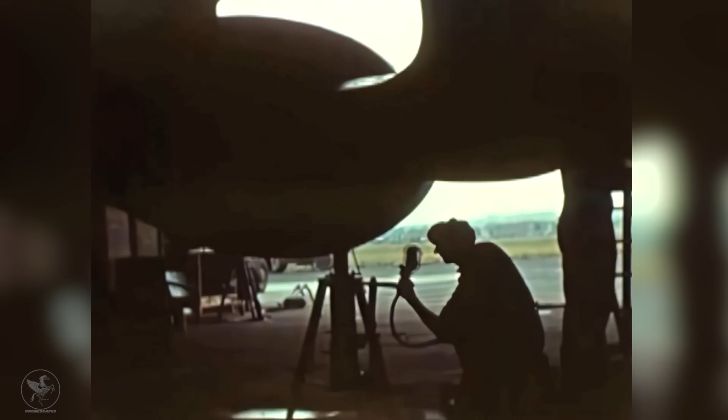On June the 12th, 1944, a new and deadly aerial threat appeared in the skies over southern England. Fast, sleek, and powered by a pulse jet, it was the world's first cruise missile, the V-1 flying bomb. In response, the RAF rushed into service its most advanced and secret weapon, the Gloster Meteor Mark I.

This happened in 1941. I was ferrying a Wildcat from Scotland down to Croydon.

I ran into extremely bad weather over Lincoln, and it was any port in a storm. I went into Cranwell. Although they were reluctant to have me, they realized the weather was bad and they let me land there. And I was astonished to find the place

alive with civilians. And I thought, this is an RAF airfield. Where are all the RAF people? And there were civilians everywhere. When I got out and asked what it was all about, there was a great conspiratorial air about everybody.

Nobody would tell me why these people were all there. And I was roomed up with a guy who was a very nice fellow. I became very firm friends with him. And I kept asking him what all this was about. And he wouldn't say, and as a diversion, he took me off to the cinema that evening to keep me

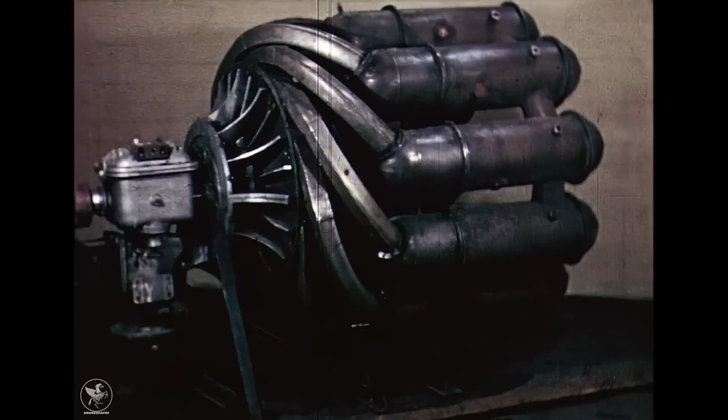In April 1937, Air Commodore Sir Frank Whittle's first gas turbine aero engine was given its initial trials. This engine was designed and built with the assistance of the BTH Company. The firm of Power Jets Limited had been formed to proceed with its development. After working under Whittle's direction at a small factory near Rugby, the firm moved in 1943 to a new factory near Leicester, built for them by the government. Here, rapid progress was made in the development and manufacture of Whittle engines.

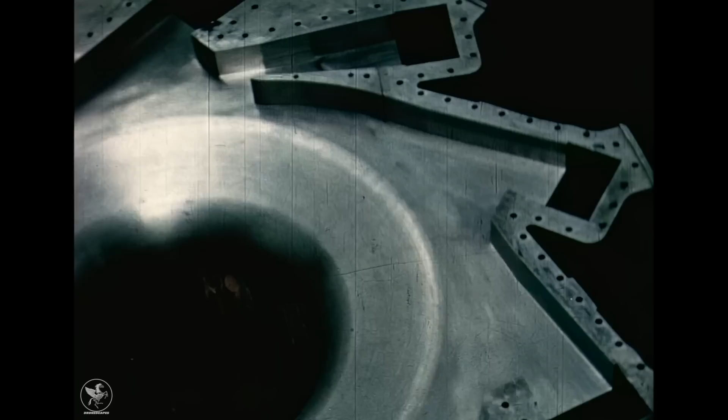This is a model of the W2/700 engine, which, although weighing only slightly more than the original flight engine, developed 3 times the power. The way in which the Whittle jet engine works is simple. Air is drawn into the engine by a centrifugal compressor. Although similar to the compressor of an ordinary aero engine supercharger, it is much larger, handling more than 10 times the amount of air.

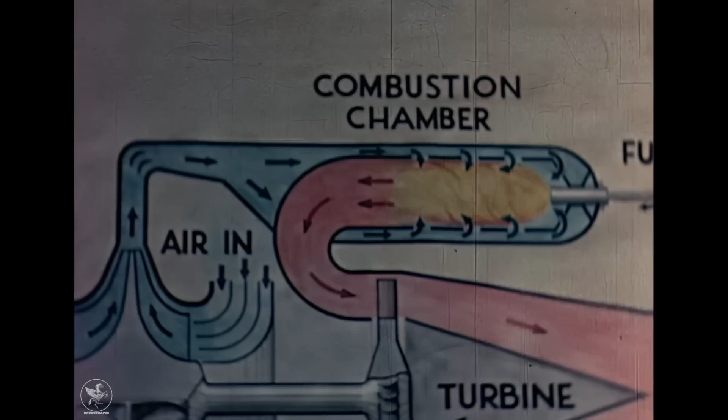After being compressed, the air passes to the combustion chambers, where it is heated by a spray of burning paraffin or petrol. The heated air and products of combustion then pass straight to the turbine, which is driven round at speeds up to nearly 20,000 revolutions per minute. The turbine in turn drives the compressor, to which it is directly coupled. A large part of the energy in the heated air is absorbed by the turbine, to enable it to drive the compressor and fuel pump. The remaining energy is used directly in the jet to drive the plane forward.

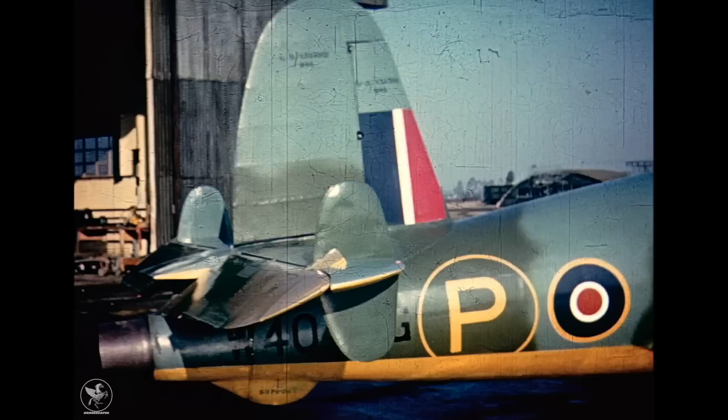In May 1941, the first flight of a British jet-propelled aeroplane took place. Built by the Gloster Aircraft Company and powered by a Whittle engine, the E.28 was purely an experimental plane. With this plane, much useful flying experience was obtained. The absence of noise and vibration in the cockpit, coupled with the simplicity of the controls, greatly impressed the pilots.

The E.28 can now be seen in the Science Museum, South Kensington. Here is the prototype of the RAF's first jet fighter, the Gloster Meteor. The early Meteors were powered by Rolls-Royce Welland engines. These were a development of the Whittle W2B engine.

The first RAF squadron to be equipped with Meteors was number 616. After carrying out their initial training at Farnborough, they transferred to Manston Aerodrome, Kent, in the summer of 1944. While at Manston, they went into action against the flying bombs, and were found to be the most successful of our fighters, shooting down the greatest number of bombs per flying hour.

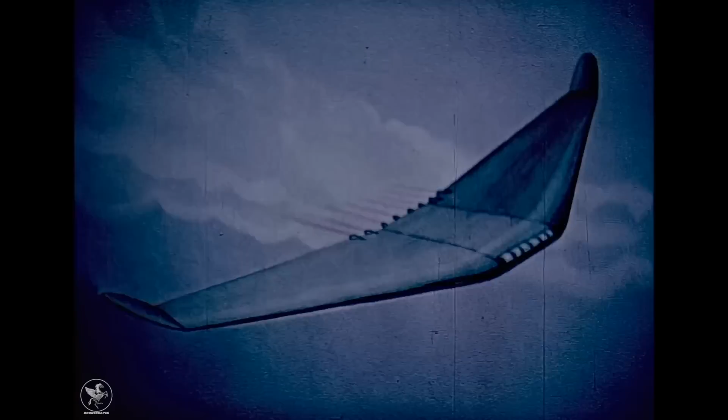We were running into all sorts of difficulties in 37 and 38, not the least of which was the financial problem, because our financial backers were expecting miracles, I suppose. They thought we would have an aero engine within a matter of weeks. Well, of course, we had breakdown after breakdown, and they began to lose heart. And they did not produce the money that they promised. They had an option, you see, to produce a certain amount of money after a certain amount of time, and they obviously got cold feet.

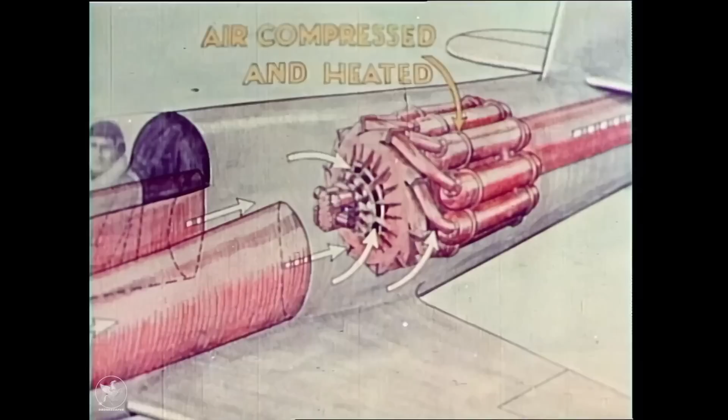The result of that was that the control of the company passed into the hands of Williams, Tinling and myself. It didn't give us any money, but one of the conditions that we made for Falk Partners to stay in the job was that they found a certain amount of money, and they did, in fact, put in another £3,000. And we were further helped by the fact that the BTH accepted 2,400 shares instead of £2,400 for a reconstruction of the engine.

When we were in financial difficulty, the Air Ministry were very hesitant to help because we were in financial difficulty. There was a catch-22 situation going on. They said, this is a company backed by the city, Falk Partners being a city company, who are just out to make money quick. And here they are running out of money. They don't have the courage to put money in. We're not going to risk our money. And so, as I say, you had a catch-22 situation.

But they did, after we'd first run the engine and shown that it at least was self-driving, agree to a very limited contract, £200 an hour for running of the second edition for 10 hours. That would have been £2,000, £1,000 for a report on what had happened up to then, and so forth. A contract which totalled about £5,000.

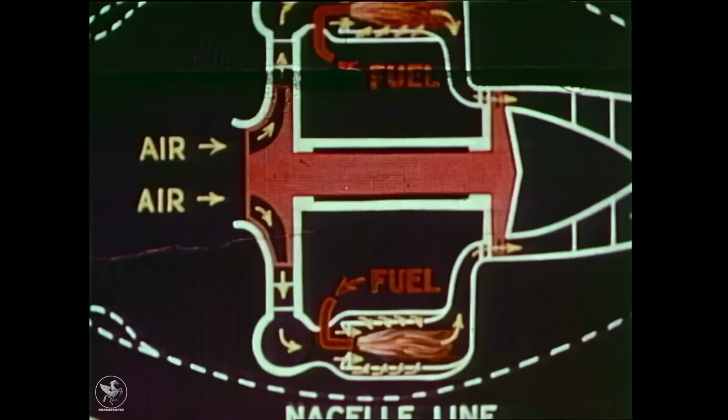But there was another catch-22 situation came out of that, because as soon as they gave us a contract, we came under the Official Secrets Act and couldn't raise private money. Because you can't go to people and say, look, we've got a wonderful idea, put some money into it, we can't tell you what it is. So the acceptance of a contract from the ministry virtually stopped us from raising private money.

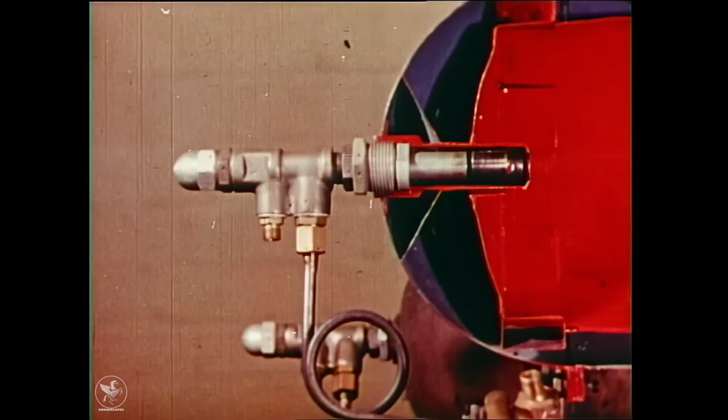However, you had in, I think, Sir Henry Tizard, and I think also in Arthur Tedder, some fairly staunch friends during 37, 38, 39. One of the big factors in the course of the development was that we enlisted the interest of Air Marshal Tedder and Sir Henry Tizard. Sir Henry at that time was chairman of the Aeronautical Research Council, and he, you might say, was a believer in gas turbines, and fortunately too he seemed to be a believer in me. He seemed to think that I knew what I was doing,

and I think in the light of events he was possibly right. And Tedder came up to see what we were doing and saw the engine run and was suitably impressed. And he became a convert and decided to back the project. But at that time, the Director of Scientific Research and the DDSR from the Air Ministry, what was their attitude?

The Director of Scientific Research had been converted a little earlier than Tedder and Tizard, because he was more intimately connected with it. But he'd been a sceptic, you know, up to about June 1939. He'd been giving us the money, what little he did give us, on the basis that it was long-term research. And he thought it would contribute to what was going on at Farnborough.

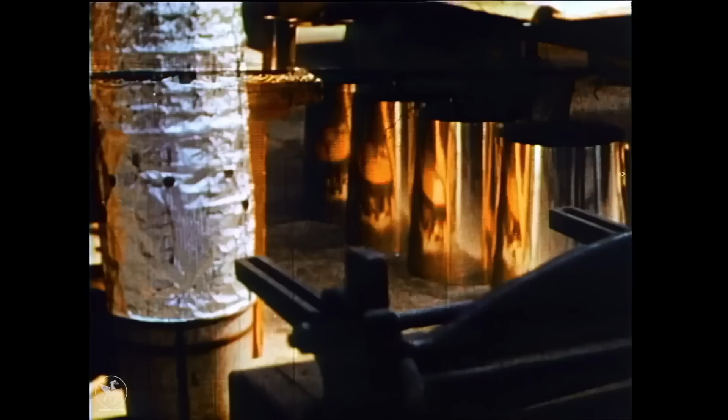And, of course, at that point, was it 1937, 38?

Can you just give me this back?

At that time, you had from Farnborough, in the person of A.A. Griffith, a rather unsatisfactory report. When, just after the engine first ran and we'd submitted a report to the Air Ministry, this was the subject of another report by Griffith, the man who turned the job down in the early days, and his report damned it with faint praise. He brought in all the difficulties, said that no propeller meant that we wouldn't have the slipstream to help us take off, and so forth.

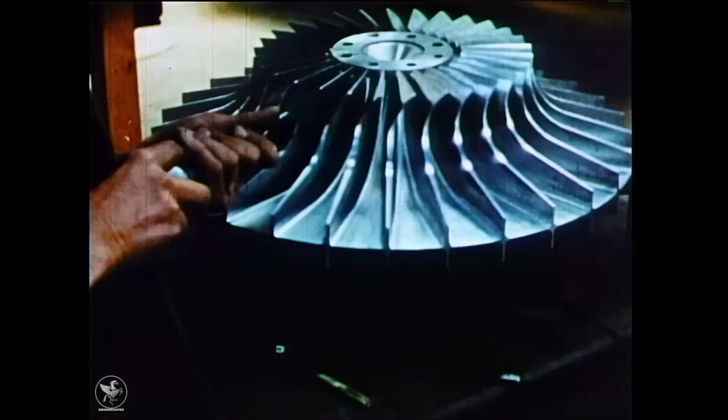And his final conclusion was more or less that it might have some use if high performance were needed for a very short time. I don't know why Griffith reached that conclusion, except that he seemed to ignore what we were trying to do. He talked as though the whole idea was to fly just where the Spitfire and other aeroplanes were flying, namely at heights up to, say, 20,000 feet and so forth. He didn't seem to register that we were aiming to fly at 40,000, 50,000 feet, well, even 60,000 feet.

Fine, I come now to Dr. David Pye, and June the 30th, I think, 1939, wasn't it? Can you tell me what happened on that day, the 30th of June?

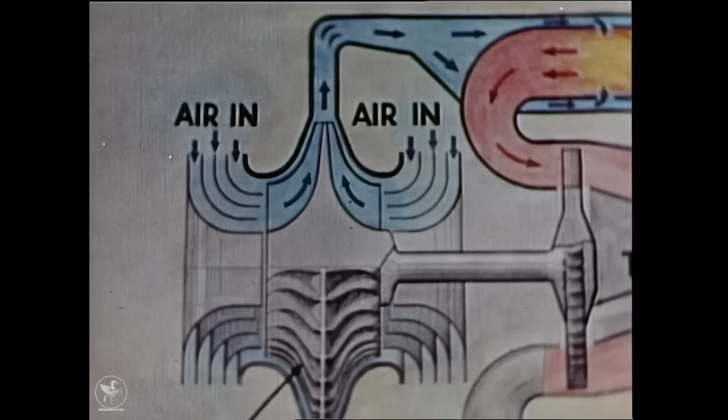On June the 30th of 1939, we managed to get a big breakthrough in the attitude of the Air Ministry, in that Pye, Director of Scientific Research, came up to see the engine run, and we managed to keep it going for about 20 minutes in his presence at 16,500 RPM, at which speed it pulled about 860 pounds of thrust, and he became a complete convert. So much so that he agreed that an engine for flight should be ordered, and that an aeroplane to use it should be ordered too.

Perhaps you could give me that little anecdote about driving him back to the station. An odd thing was that he became such a convert that when I drove him back to the station to get his train back to London, I had the curious experience of hearing him explain to me all the advantages of the engine, that it could run on any fuel, that it was vibrationless, etc., etc.

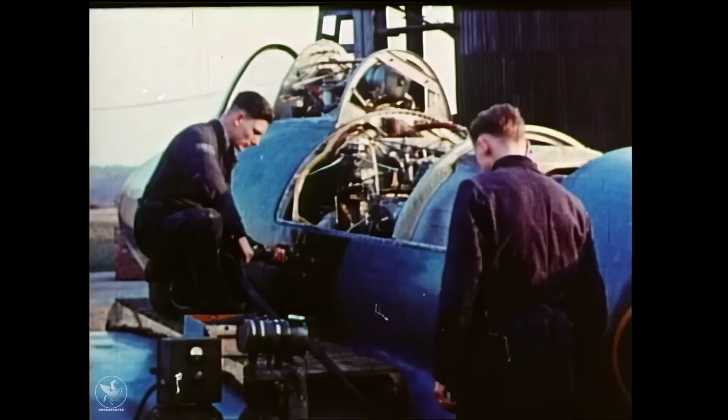When the ministry decided we had a good project, they wanted to give an order for an aeroplane and for the engine. Well, they gave us the job of getting on with the engine, and we subcontracted the building of it to the BTH. We wanted them to give us the order for the aeroplane too, so that we could subcontract and thereby control it. But they wouldn't have that. They gave the contract direct to Gloster's. Well, that was fine, as it proved, because Gloster's, under Carter, proved to be very efficient. So the arrangement was satisfactory in the end.

And we designed the W1 engine for flight, very similar to the original engine called the WU, but very much lighter. It was designed to produce 1,240 pounds thrust, and the weight came out at about 620 pounds. The consequence of having to allow both for the difference in speed between the root and the tip of the blade, and for the difference in speed of the whirling air entering the blades, meant doubling the twist of the blades. Another consequence of this way of designing was that it made a tremendous difference to the end load on the bearing. In fact, the end load of 1,800 pounds they'd been talking about virtually vanished.

Simplicity, I think, was the keynote of the first engine, wasn't it? The simple centrifugal compressor. Perhaps you could explain that. We aimed to have the simplest possible engine to start with. There were certain alternatives open to us, the centrifugal compressor or the axial flow compressor.

The centrifugal compressor is a very simple thing. It's simply a kind of glorified rotor, the kind that you have, say, in a vacuum cleaner, with the diffuser blades on the outside. So there's just that single set of blades for the compressor, instead of the axial flow, which has many, many rows of blades, each of them having, say, 50 blades. So it's a much more complicated device.

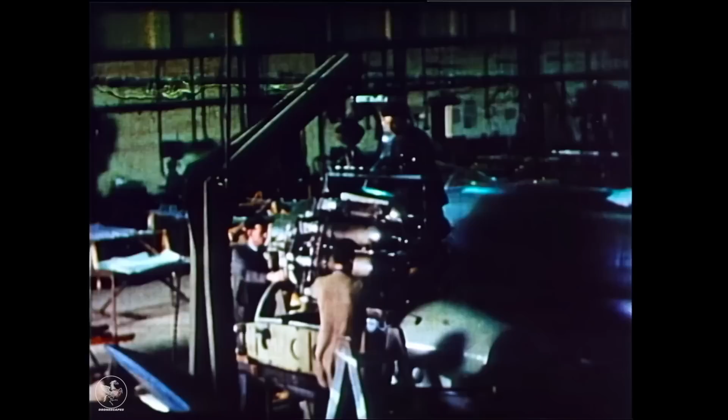You didn't go along with A.A. Griffith altogether in the aerodynamic blade design. How were your blades designed? Griffith had a theory that you should design the blades as aerofoils, but I did not agree with that then, and I do not agree with it now. He argued that you should design the blades; I say that you should design the channels between the blades. The difference being that, since you are steering fluid through channels, clearly it's the channels that are important. If you make an aerofoil and then bend it to give the right kind of angles you need in a turbine, then you get constriction and divergence which you don't want in a channel.

Fine, this may be the point. In fact, I'd like to go over it again in this context. Can you tell me something now about the vortex blading theory and how it came to be an issue?

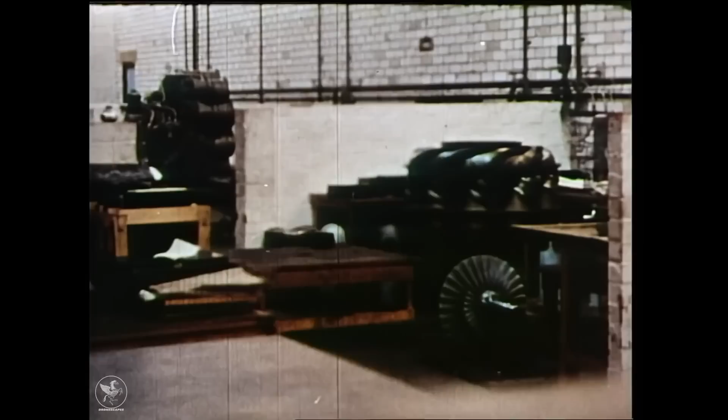I found out more or less by chance that the turbine blades being designed by BTH were based on a quite different concept of blade design than what I thought was proper. I didn't realise this until I went to a meeting in the Deputy Chief Engineer's office, where they were discussing a change in the blade design. They said one consequence would be a change in the end thrust on the rotor—the load on the thrust bearing would be 1,800 pounds instead of 150 or whatever it was. I couldn't understand this, so I went away and thought about it. Then I went up to the blade design office and asked one of the engineers there, L.J. Cheshire, what pressure difference he assumed between the root of the blades and the tip of the blades after the fluid left the nozzles. He said, 'What pressure difference?' To my astonishment, I found they did not assume the air coming out of the nozzles was whirling, but that each pair of nozzles was sending out straight jets, which of course is not what happens.

And the effect of this was that you altered the blade pitch? I pointed out that the fluid coming out of the nozzle ring would be a vortex, and the centrifugal pressure gradient meant there would be a corresponding difference in velocity. At the root, the smaller diameter of the vortex, fluid is moving much faster than at the tips—you see that in water running out of a bathtub, and as the water moves nearer the centre of the vortex, it spins faster and faster. That's what happens in the flow out of a set of turbine nozzle rings. To allow for that, you have to put a good deal of extra twist on the blades—in fact, double the twist that BTH were putting on. And that settled the problem.

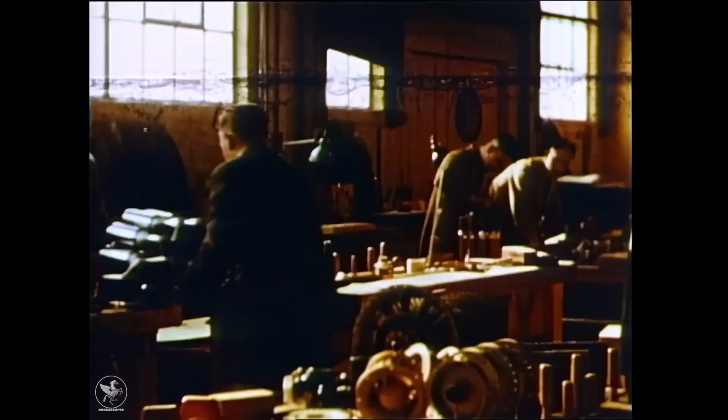Right, I come now to Power Jets itself, the company in 1939. How many employees did you have, and how many were fully trained engineers? In 1939, we only had a handful, about half a dozen. Then at the beginning of 1940 we began to build up a team, and I was very careful in picking real quality—first-class honours Cambridge, first-class honours Oxford, Imperial College of Science, and so forth, Whitworth Scholars. I had quite a collection, and I think I can claim to have built up a brilliant team. A young team, yes, mainly.

There were just... one was a little bit older than myself, and then we added one of my former instructors. He became my deputy. He was quite a bit older than me. That was Wing Commander Lees.

And presumably for the young engineers, how were they recruited in terms of secrecy? When we were recruiting young engineers, they came to this scruffy old foundry we were inhabiting, and were somewhat surprised, I think, when our managing director, as he had become, L.L. Whyte, took them into this old ancient brick building, up rickety wooden stairs, into an office with a beautiful carpet.

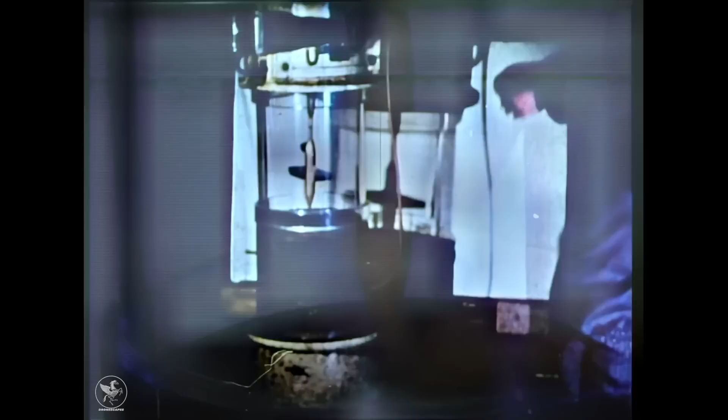Farnborough had started, and indeed was the first research establishment in the world to work on compressibility and transonic testing, starting with the Spitfire 5 back in 1941. Its boffins realised they had the key to supersonic flight, so they issued a specification in 1943 for a supersonic research aircraft. They chose Miles to design the aircraft, with Farnborough's help. This was designated the Miles M52. One has to say they made a very good job of it.

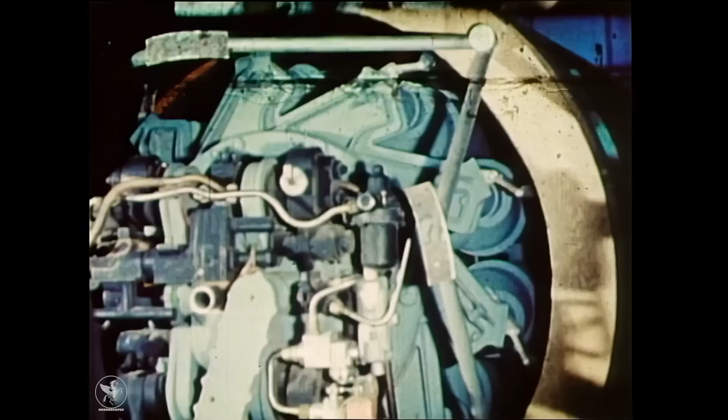It had a special engine to be built by Frank Whittle, a turbine fan with reheat. We believed we could reach 1,000 miles an hour. The aircraft also had a biconvex wing, known as the Gillette wing, and thirdly, it had a flying tail. This folds the tailplane and its elevator into one solid piece, making the aircraft more controllable as it nears supersonic speed.

I think because of the impression I made, or so I'm told, with getting the Mosquito onto the deck, they thought, we'll use this guy in the high-speed flight. In 1944, Brown became the Navy's first pilot to fly a jet aeroplane. By contrast, no test pilot at Miles had yet flown one. I was chosen to be the pilot for the simple reason that the fuselage at the pilot position was only 4 feet in diameter, and you couldn't get a pilot in there of more than 5 feet 8.

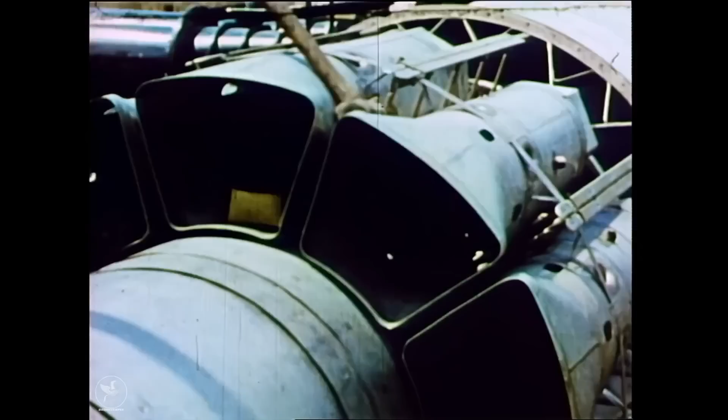In December 1945, when the aircraft was 92% ready for first flight, there arose a great problem: Frank Whittle, who was then running Power Jets, fell out with the establishment over whether he or Rolls-Royce should produce production jet engines. It was ruled that Rolls-Royce should do it. He was so unhappy with this that he resigned from Power Jets. A month and a half later, the M52 was cancelled.

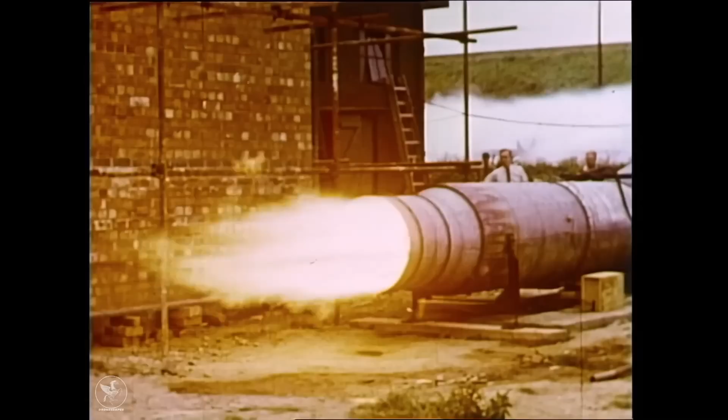I had already been given the date for the first flight, which was to be October 1946 at Boscombe Down. There was no prior notification given either to Miles or to Farnborough, and I was hopping mad, frankly, when I heard the decision. Nobody would tell Brown why the M52 had been cancelled.

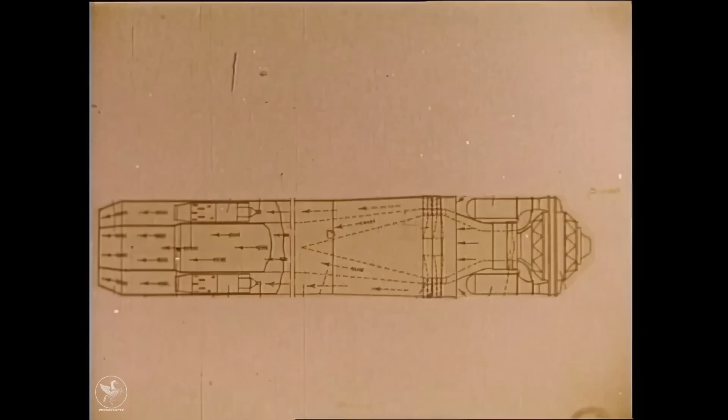About 6 months before the cancellation, the Ministry of Aircraft Production had ordered that we receive a visit from the Americans, that everything be shown to them, nothing withheld whatsoever. They would even be given copies of all the reports and design work. Without this visit, the Americans would not have advanced through the sound barrier with the X-1 as early as they did. I think it was certainly well within our grasp and taken away, and this is the galling thing, for a reason that up to today we are not sure why it was done.

Have you thought how your own life would have gone down a different avenue, perhaps? Perhaps, yes. I wouldn't have relished it to the same degree, I don't think.

While waiting to fly the M52, Brown had been working at Farnborough on another project that would further expand the military potential of jet aeroplanes. We were advertising, but of course we couldn't say what we were advertising for. And when we were interviewing them, we couldn't tell them what we wanted them for, although I think some of them guessed from the questions we asked.

Can you give me some idea of the costs, the Power Jets' total costs to 1939 compared with Germany? Right from the start, we were working on a shoestring financially. £2,000 was the original sum subscribed, but dribs and drabs of money came in — £200 from a friend of mine, £500 from a friend of someone else — and it built up slowly.

And by 1939, we had spent — I don't know the actual figure, but I think it was about £7,000. In the balance sheet before July 1939, the item 'cost of unit' was 4,000 and a few hundred pounds. So though we'd been going for over 2 years, that's all we'd spent on the engine. We were doing monthly billing; BTH were doing it on a cost-plus basis, but fortunately for us, their overheads were only 150%.

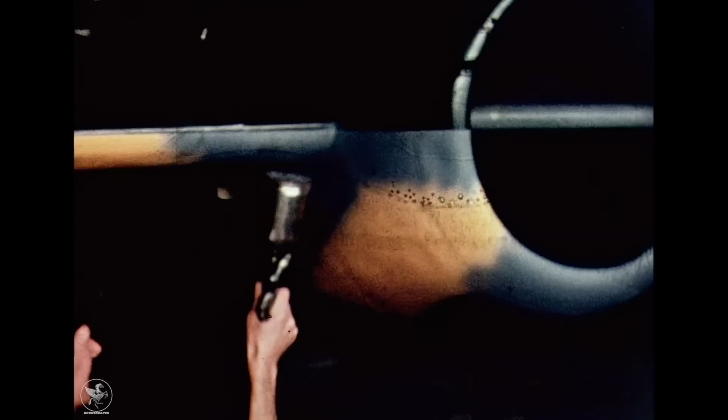The fact of the matter is, of course, that you were having to rebuild the engine out of old parts, and I think the official historian says that this really hampered progress quite considerably. We were hampered repeatedly, not only by money difficulties, but by things associated with money difficulties. We couldn't afford to replace parts which had been damaged.

Overall, at this time, were you aware that Whitehall itself was troubled by what it felt to be the anomalous position of Power Jets?

I don't know what the position was of the ministry with all the various undertakings they were trying to give to various people. They were telling Power Jets they would protect us. They were trying to get undertakings from the Rover Company, which the Rover Company refused to give. They were trying to get undertakings from the BTH Company, which they were also refusing to give.

So they were in a first-class difficulty, really. And it was this, presumably, that prompted their move towards Rolls-Royce, was it?

Well, the situation became so bad that it looked as though there would be a complete hash of everything. Rover were making such a poor job of the engine that the order for the production of the Meteor was cut right back.

And then Sir Wilfrid Freeman at the ministry wanted to hand the whole job over to Rolls-Royce. I successfully resisted that. I think I did, anyway.

But nevertheless, Rolls-Royce did come into the picture in a big way, in that it was agreed that they would take over the job from the Rover Company and hand over to the Rover Company their tank engine, the diesel engines they were making.

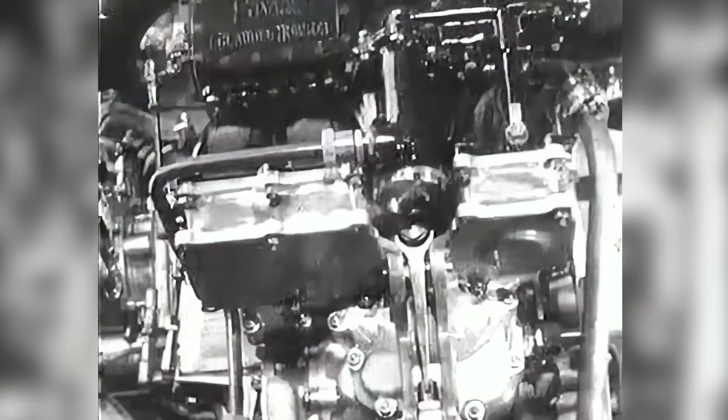Opel's experiments made no impression on the aero engine manufacturers, who continued to construct their heavy, intricate piston engines, though now employing the new technique of supercharging—using impellers, high-speed paddle wheels driven by the engine, to pump the petrol-air mixture into the cylinders in an attempt to maintain sea-level performance in the thin air of high altitude. However efficient the designers and metallurgists made the power plants, the weak link at high altitude, the propeller, remained.

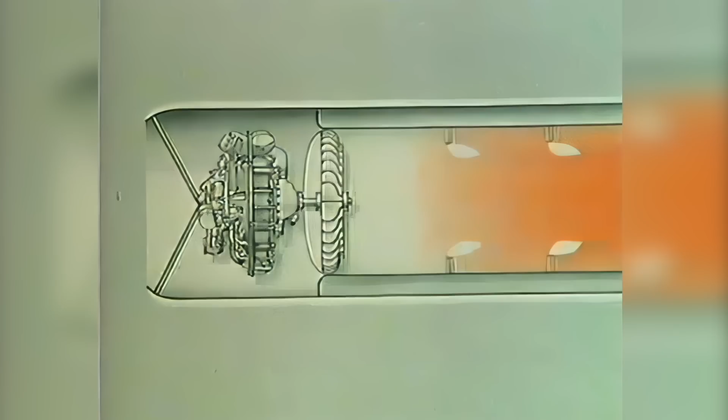Searching for an alternative, Frank Whittle at first considered using a piston engine to drive a compressor, pumping air into a jet pipe with burners, but he rejected the idea as hopelessly inefficient, which indeed it was. That proposition had been one considered in his Cranwell paper. I didn't have the complete idea then, I was just groping towards it. Then in 1929, the penny dropped, and the idea of the turbojet came to me.

But the principle of jet propulsion had been discovered much earlier, in 120 BC, by Hero of Alexandria. His engine consisted of two small jets angled from a globe of silver, fed by a boiler through supporting pillars. With pressure up, the steam jets propelled the globe. Thus man's first known heat engine was jet-propelled. 1600 years later, Sir Isaac Newton formalized the effect as his third law of motion: for each action, there exists an equal and opposite reaction.

And if James Watt's celebrated observation of the boiling kettle's lid had applied Newton's law instead to the spout, he could have invented the turbine.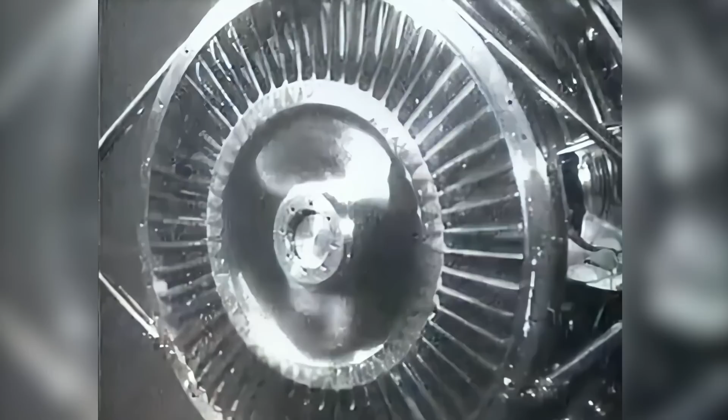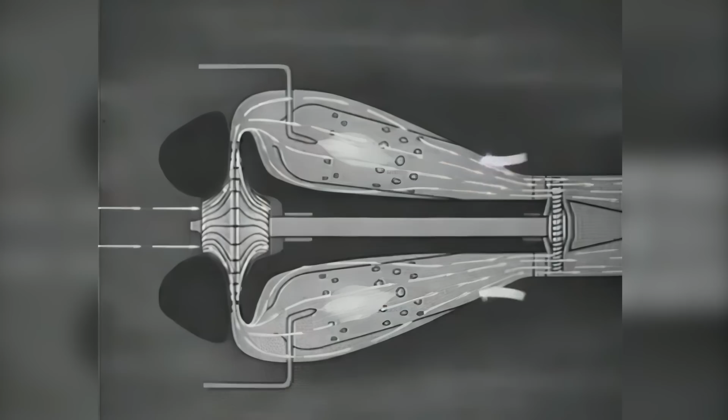Like this simple steam turbine, the gas turbine which Frank Whittle proposed is extremely simple, having only two major moving parts: the compressor wheel on the left and the turbine on the right, both keyed to a single shaft and housed within a pressure casing. The compressor's impeller forces air into the casing, which also contains a number of combustion chambers in which fuel, kerosene, is continually burnt. The expanding gases resulting from combustion pass through the turbine, turning it at very high speeds, up to 17,000 RPM, before exhausting from the jet pipe with enough velocity—1,000 pounds in the early engine—to push the aircraft forward in powered flight.

In 1930, that was still all theory. Undaunted, Frank Whittle patented his gas turbine on the 14th of October that year. The high-speed monoplanes, which could conceivably utilize a jet engine, now existed, at least in prototype. But Frank Whittle knew that to construct a practical gas turbine aero engine was going in many ways to be a much more formidable undertaking.

The massive 36-litre Rolls-Royce engine, which had powered the Schneider Trophy seaplanes, had required the most intensive research, not only into the very special chemistry of the fuels, but also into the then unknown territory of high-pressure supercharging. Rolls-Royce, with the aid of the Royal Aircraft Establishment, finally managed to achieve a supercharger that could efficiently compress the mixture to twice sea-level atmosphere, and that in 1929 was considered very good going indeed.

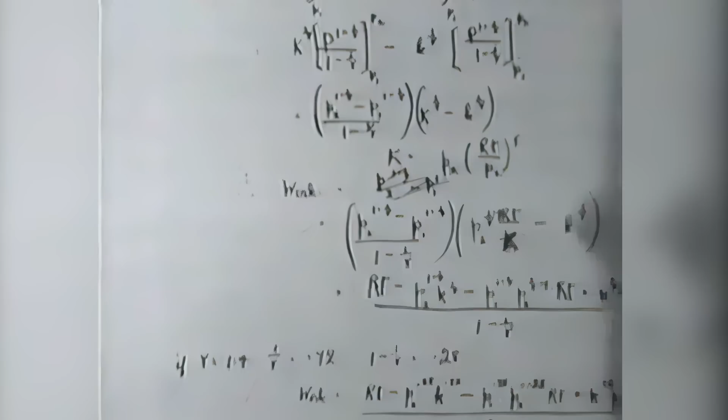Frank Whittle had calculated that for his gas turbine he would require a much larger and far more efficient compressor, working at 4 times that pressure. The calculations for the compressor were included in a paper which Whittle wrote to prove the case for the gas turbine. But none of the aero engine manufacturers were in the least interested in his proposals, at a time when meagre orders for existing engines were hardly sufficient to keep the firm solvent.

One obvious conclusion drawn from the Schneider Trophy was that the days of the biplane were numbered. The Air Ministry was therefore experimenting with monoplanes like this long-range Fairey. To spend the money instead on exotic engines, which could at best take years to develop, was out of the question.

So to cool his ardor, the Air Ministry posted their young inventor to the Marine Aircraft Experimental Establishment at Felixstowe, to discover how a land plane behaved in water.

Frank Whittle also made 47 experimental catapult launches. One was to prove memorable, for his passenger was thrown out but managed to grab hold of the tailplane as he left. I took a quick glance over my shoulder, and I saw there was a body on the tailplane, but I didn't know it was my passenger, until I found I wasn't losing control entirely.

I'd got the stick right forward, full throttle. I took a more collected look and saw that it was my passenger, who had struggled round into a sitting position with his back against the fin wire. And when he saw me look round, with his helmet blowing out and his cheeks blowing out, he gave me a thumbs up sign with his spare hand. The other one was holding onto the fin. And I saw him go, okay. I thought to myself, well, you may think you're okay, old boy, but we can't get down.

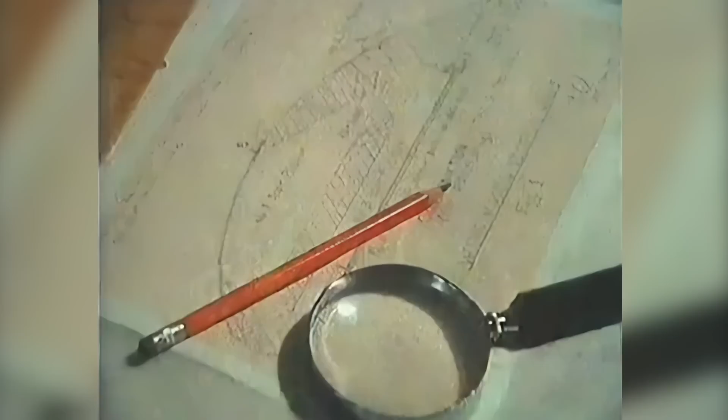He and a partner did, in fact, manage to contact a small outfit, commercial bankers called Falk and Partners, and they agreed to put up some money. As a result, Power Jets was formed in March 1936. But before the company was actually formed, Falk and Partners agreed to place an order with the BTH for the manufacturing drawings of an experimental engine. To this day, Sir Frank still has the original drawing board, which was in 1936 Power Jet's principal asset.

The first jet engine was drawn on that. The BTH first drawing I wasn't satisfied with, so I did a half-scale drawing on this board, and that was the basis of the experimental engine.

Power Jets had no staff except me, and I was on loan from the Air Ministry as a squadron leader. So the initial practical work was contracted out to the British Thomson Houston Company at their Rugby steam turbine works, where gradually the strange engine took shape: casing, combustion chamber, the impeller of the compressor, and the turbine.

By the 12th of April 1937, the engine stood complete and ready for testing. The question nobody liked to ask was, would it work? When we first tried to start it up, we certainly succeeded.

I was on the controls, and we got the thing running up to 1,000 RPM, and I got a signal from one of the fitters that there was a light up in the combustion chambers, and I signaled for the speed to be raised to 2,000 RPM, which was done with an electric motor. And then I opened the main fuel control to get it going under its own power, and it certainly did.

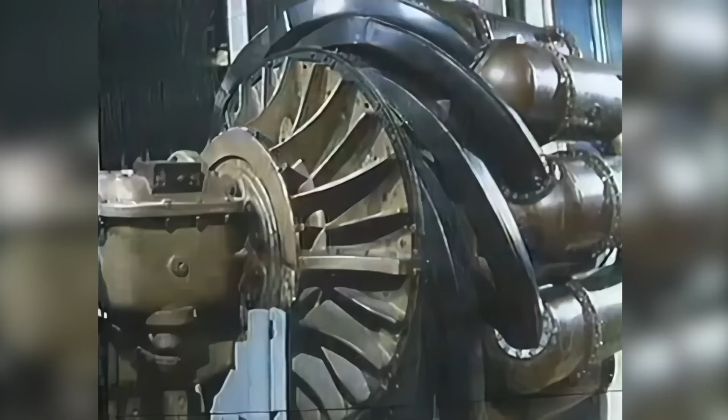With delays caused by the move and the chronic shortage of everything, especially money, it took a year to rebuild the engine, which seized up, to be yet again rebuilt in its third and final form, to become the prototype of the engine which would eventually fly, with the 10 interconnected combustion chambers. These were to prove one of the most difficult components of the engine to get right. This is that original Whittle engine, the first in the world to run, now preserved in the Science Museum, London. Incredibly, in spite of being constructed from salvaged parts, it ran remarkably well.

It was getting up to speeds of about 16,500. By the time we were getting it to this stage, it had been through so many mishaps that it was really a heap of junk. And so when I look back on it, it rather surprises me that we got it up to 16,500. That was in June 1939.

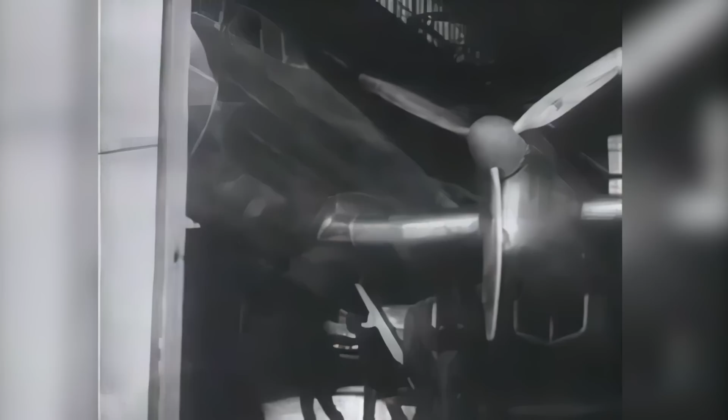By then the Germans had annexed Austria and the Sudetenland of Czechoslovakia. The Munich crisis of September 1938 had passed, and of the peace in our time, then predicted by Neville Chamberlain, just 3 months remained. Since 1933, when Hitler first came to power, the Luftwaffe had been training and growing, secretly at first, then openly, until by 1938 it was revealed to have achieved and surpassed parity with the RAF. There was to be little doubt as to the quality of the Luftwaffe. For example, the Stuka dive bomber, which was soon to spearhead the Blitzkrieg, and the Ju-88, conceived in 1935 as a Schnell bomber, a bomber with the performance of contemporary fighters.

To counter the Luftwaffe expansion, the RAF began to rearm. In 1936, the prototype of R.J. Mitchell's Spitfire had flown, as had the Hurricane, and both were now in full production to re-equip the fighter squadrons of the RAF, many of which were to fly biplanes until mid-1939. In the 12 months' grace between Munich and the outbreak of war, the long years of neglect of the RAF were to some extent made good. By September 1939, Fighter Command was at last equipped with modern aircraft, backed by an efficient radar-based fighter control system, and was considered to be able to counter the Luftwaffe.

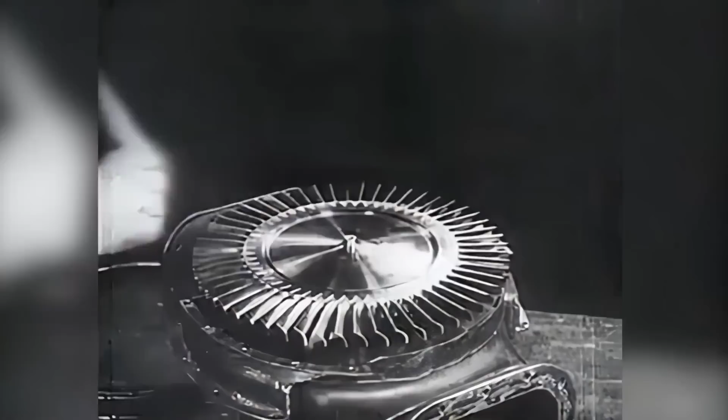However, if anyone at the Air Ministry had thought that the German aero engine industry might have made the transition from their turbo superchargers to a gas turbine and be producing a German jet, then their appreciation went unheeded. In point of fact, the Germans had already made that step. It was the experimental Heinkel 178, powered by a jet engine designed by a young physicist from Göttingen University, Hans Pabst von Ohain, who in 1936 had approached Ernst Heinkel with a proposal to build a gas turbine.

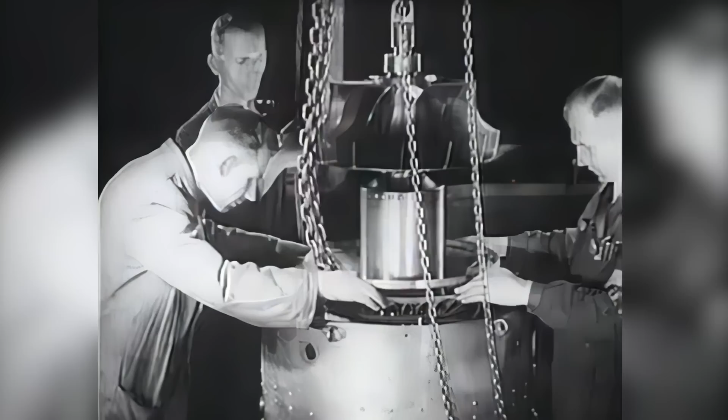Heinkel agreed to provide the facilities and finances for von Ohain to build an experimental turbine which ran on hydrogen. The turbine produced only 176 pounds of thrust, but it impressed Heinkel sufficiently for him to back the development of a flight engine. With the backing of a large aircraft factory, the engine, similar to Frank Whittle's, was built and bench-tested by the winter of 1938. On completion, the engine was installed in the specially built He 178, which was ready by the 27th of August 1939 to make the world's first gas turbine-powered flight.

Von Ohain remembers the day well. Well, we had a short airfield. Warsitz had already, the day before, taxied the aircraft, and he thought he could make it.

It was an early morning, slightly foggy, but only very slightly foggy. And he accelerated. It worked without any problem. He lifted up, and then we lost him because he went on straight, and we didn't hear anything anymore. And so we waited, and then 5 minutes, a very long time, then he came back, then he curved around,

and we wondered why he is not landing. And so we felt, oh, he feels very good there. But the fact was that he couldn't really see, because the glare of that fog, he said, was terrible. The sun came up, and when he wanted to land, it was such a glare he couldn't really exactly see the airfield. So he made several rounds until he could really safely set down.

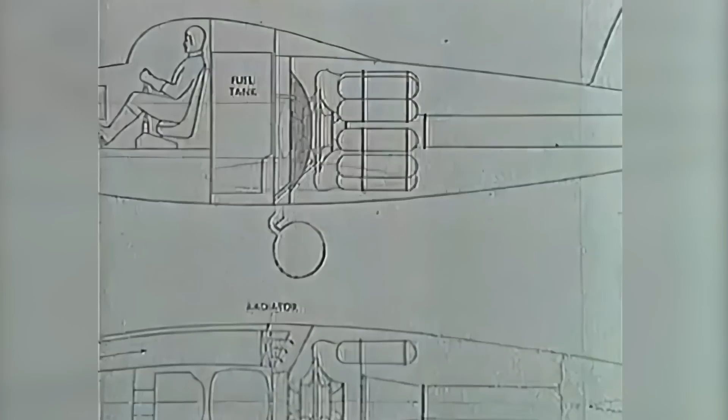But the Air Ministry had at least bought the long-suffering original engine and had placed a contract for a flight engine, the W-1, to power an experimental aircraft which the Gloster Company were to design and build, the Gloster Whittle E-28/39. But it was still on the drawing board when the Second World War broke out, and all that Power Jets had was a model. The war, at first, at least in Britain and France, called the Phony War, was soon to change, to become the reality of Dunkirk and the Battle of Britain.

That summer, Frank Whittle and his small staff still had the problem of finding an established aero-engine manufacturer, for although the E-28/39 had yet to fly, it now had a successor, a twin-engine fighter, eventually to be named Meteor, to follow the purely experimental Gloster Whittle. The obvious choice, Rolls-Royce, were like the other major companies fully stretched, supplying aero-engines for war production. Another difficulty was Frank Whittle's concern that a big company might absorb Power Jets, whose patent position was far from satisfactory.

The patent position was not strong, the first master patent having lapsed. We had several other patents, but I didn't think that the patent position was very strong. So we were looking for subcontractors who were not likely, as we thought, to start competing with us. And it happened that the wife of one of our directors was a friend of the wife of a director of the Rover Company, and as a result of that, we invited the Rover Company to act as subcontractors to us, which they agreed to do.

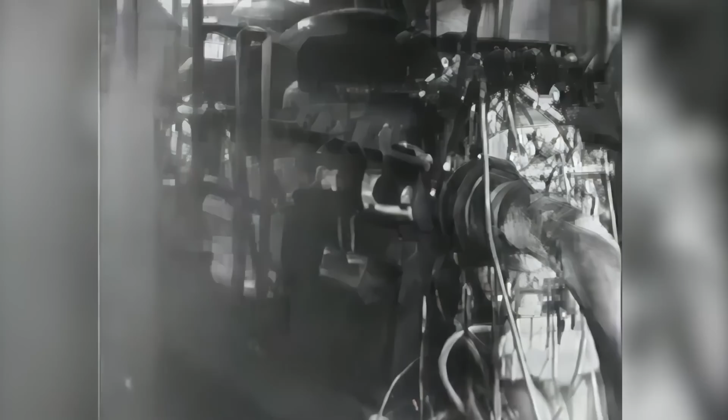And I can't say I was an immediate convertee to jet propulsion. I hadn't really studied it sufficiently for that. But I must say that standing by his engine when it was running, and they used to run more or less in the open in those days, one always had a sensation here was tremendous power, you know. Stanley Hooker's brilliant work on the supercharger for the Merlin shared common ground with Whittle's jet compressor.

Lutterworth wasn't very far away, of course, only 30 miles or so. And I, having met Whittle and got on very well with him from the beginning, I used to go and see him fairly frequently. In fact, I used to take him the Merlin supercharger results to look at, because, you see, he had no tests of his own supercharger. There wasn't a plant big enough in the country to test it. So I used to take him these things, and we had a lot of discussion.

And eventually, when his engine was running at about 1,000 pounds of thrust, I went to see Hives, Lord Hives, or Mr. Hives as he was at the time, and tried to persuade him to go to Lutterworth and see the engine. And he said, "What does it do?" And I said, "Well, it's giving about 1,000 pounds of thrust." Well, now, we were all used to horsepower. We knew the Merlin gave 1,000 horsepower or more. And one must admit that 1,000 pounds of thrust doesn't sound much compared with 1,000 horsepower.

And Hives turned to me and said, "Well, that's not much, is it? It wouldn't pull the skin off a rice pudding, would it?" And I went away and did a sum, and went back to him and said, "Do you know how much thrust the Merlin gives in a Spitfire?" And he said, "No, how much?" And I said, 1,000 pounds. And he immediately rang for his secretary and said, "I'm going down to see this engine with Hooker on Sunday."

And what was Hives' impression? Oh, he went down, he came, he saw, he was conquered, you know, it was literally that, really. He didn't say much, he walked around, and Whittle described it all to him, gave him a proper tour. At the end of it, he turned to Whittle and said, "I don't see many engines about, Whittle. Why haven't you got more engines?"

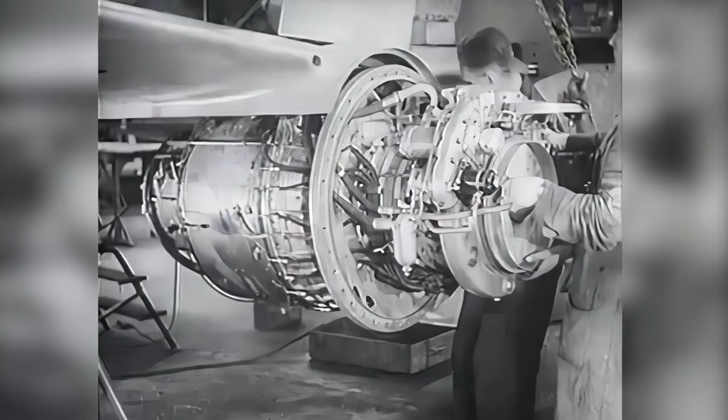After the successful test flights became officially known, orders for 9 prototype 280s followed, with the promise that if satisfactory, substantial production orders could well follow.

In a remarkably short time, von Ohain, backed by the full facilities of the Heinkel works, had designed and built a new turbojet, which gave 1,250 pounds of thrust on the bench to power the new aircraft.

Itself in many ways a most advanced concept which can claim a number of firsts, it was the first twin-engine jet, the first with a tricycle undercarriage.

And the first to fit and later to use an ejector seat. The 280 was the second jet in the world to fly. The first prototype—this is actually the third—had flown from this runway at Marienehe, the Heinkel Company factory airfield.

On the 2nd of April 1941, 6 weeks before the British jet, the Gloster Whittle, was to fly. It's instructive, therefore, to see the progress that could be achieved given adequate backing, and there is no doubt whatsoever that if Whittle's project had enjoyed the same facilities, the Meteor could also have flown by this time.

Although the 280 achieved over 500 miles an hour and bettered an FW-190 in mock combat, no mean achievement, it did not, for political reasons, go into production. Neither did von Ohain's engines.

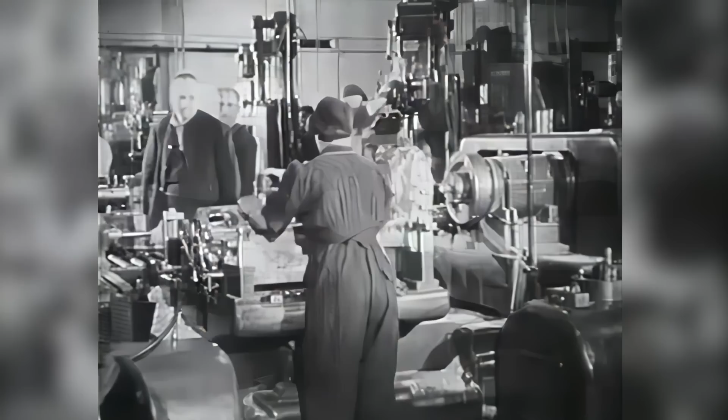The resources of what was, and arguably still is, the greatest producer of aero engines in the world was now at the disposal of Power Jets, with foundries able to cast intricate parts in steel or high-duty alloys, virtually unlimited stocks of high-grade steels and other metals, together with a large and highly skilled workforce able to utilize to the full the facilities available. A certain urgency was now attached to jet engine production.

Mosquitoes of the RAF photographic reconnaissance units had been bringing back disquieting evidence: wispy outlines of unknown delta-winged aircraft and scorch marks on the grass airfields at Lechfeld, Peenemünde and Rechlin, the German equivalent of Boscombe Down, where this photograph was taken. These scorch marks were known to have been made by experimental jet aircraft.

They could well have been made by the Messerschmitt 163, a lineal descendant of Opel's amusing rocket glider. The delta-winged 163 Comet, powered by a lightweight, liquid-fueled Walter rocket, had been designed as an interceptor fighter and possessed a truly amazing rate of climb. In October 1941, the prototype had broken the existing world speed record at over 623 miles an hour, on the edge of the sound barrier.

Rocket planes apart, a new jet was being tested in Germany by 1943. It was the Arado 234 Blitz bomber, the only jet bomber to see service in World War II, which it did during the Battle of the Bulge.

But fortunately for the Allies, the 234 had suffered from a common weakness of German wartime research: too little and too late. Hitler had banked on a short war. By the time it was clear that this was not to be, there was insufficient time to develop the promising early prototypes, which in 1941, with victory scented, had been postponed.

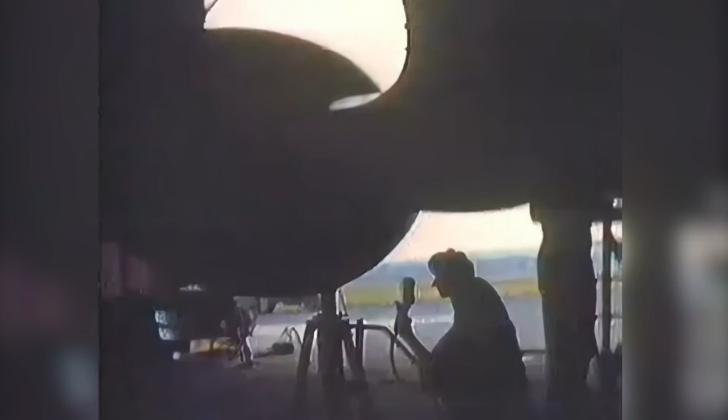At that time, the only operational Allied jets were 16 Meteor 1s powered by Rolls-Royce Welland engines developed from Whittle's design. The aircraft were hastily converted from a training to an operational role for 616 Squadron, the first in the RAF to fly jets, to intercept the very fast V-1 flying bombs.

The first jet-versus-jet combats followed during the summer of 1944, though, admittedly, they were a little one-sided.

The first American jet, the Bell P-59 Airacomet, was powered by 2 General Electric engines which were American copies of a Whittle W-1. The General Electric Company had built their version in just 4 months, but too late to see service.

In September 1944, the Minister of Aircraft Production, Sir Stafford Cripps, visited Power Jets, and Whittle suggested the nationalization of the entire jet aero engine industry.

What I visualized was a single cohesive unit with Power Jets at the hub of it, you see. And I even thought it possible that I would be the chief engineer of the whole business, since we'd started it, and our engines were, in my opinion, still the best.

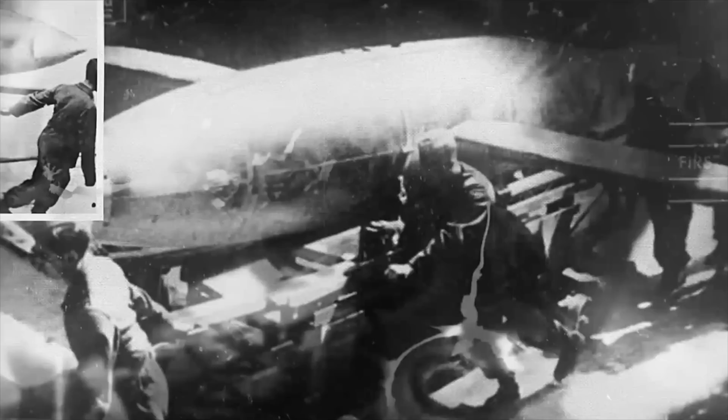This Device 76 is a small plane-like disguised bomb. Launched from a special cannon, propelled by a pulse jet engine, steered by an automatic control system, flying far distances to its great target and crashing with devastating effect via nosedive. Maximum fuselage length of 8.3 meters, wingspan of 5.4 meters.

The plane consists of the following parts: fuselage, wing, empennage, engine, and in the front, the odometer.

The wings are easily removable, attached to the spar bar. The individual fuselage parts, the pulse jet engine, spar bar and wings, are replaceable and are easy to replace. Simple connecting elements result in assembly times of only a few minutes. The fuselage consists of nose tip, nose, load space, middle part, and tailpiece.

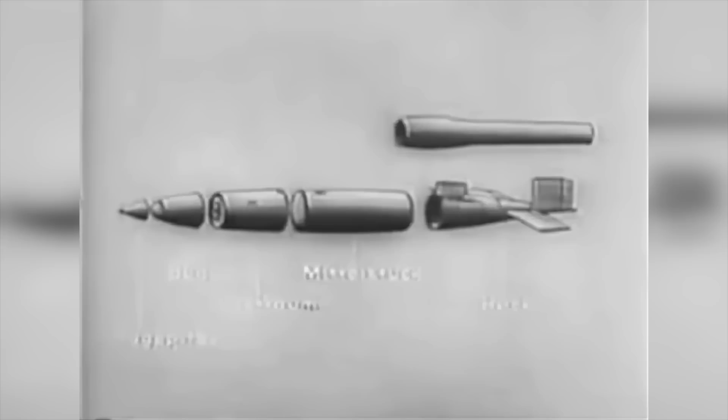In the fuselage, various single devices are housed that are needed for completing the mission of a self-flying bomb. In the nose sits the log gear and the electric impact fuse. Behind them, the compass and a wooden sphere. The electric fuse sits in front of the explosives housing.

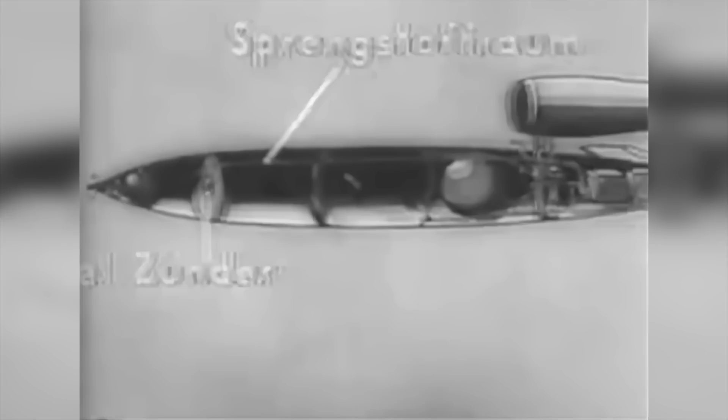The middle piece of the fuselage functions as a fuel tank, with a holding capacity of 680 liters. Behind that, the spherical bottle with compressed air of 160 atmospheres. Lately, there are 2 spherical bottles. In front and under the pulse jet engine is the engine regulator. Located in the tailpiece is the control unit, rudder machines, transmitter battery, transmitter and antenna. The site of impact is determined by the transmitter system.

The device in original recording.

The aircraft body is made out of sheet steel, using the most modern manufacturing processes of the time. Only in the front, at the nose of the fuselage, aluminium light metal was used due to compass manipulation.

Fuselage nose with log, odometer. The air log is used to measure the distance covered. The load space, over which the cable duct leads, is a welded sheet metal container filled with high-quality explosives. In 4 places, the load space is connected to the middle section of the fuselage via Fredberg screw couplings. Here is the coupling.

When launched, the 2.2-ton device is accelerated on this fitting with a force of 40 tons. The rear part of the fuselage with streamlined mounting of the pulse jet engine. At the rear, the pulse jet engine is mounted on a pendulum support with a rubber gasket. The antenna is only installed in machines equipped with the tracking transmitter.

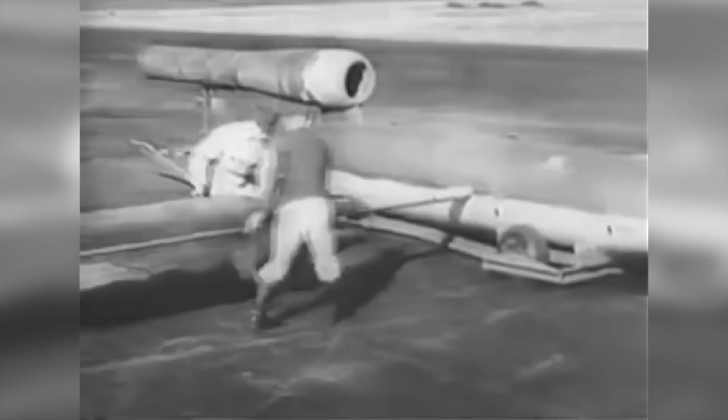After the spar is inserted and attached to the fuselage, the wings are pushed on. The wings and spar are interchangeable and can be attached to any machine. Thanks to the special measuring methods, the wings have been brought to the correct adjustment angles. When mounted at the launch site, there are only 2 to be inspected for transport damages. The wings are now prevented from slipping out sideways by turning in a screw. Thanks to the simple construction, assembly is carried out within a few minutes.

The elegantly sleek device reaches a speed of well over 600 km per hour. The pulse jet engine by Argus is used as the engine.

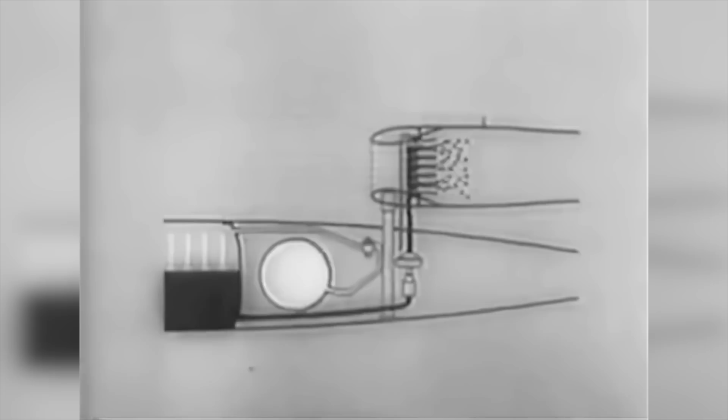How the engine works. The compressed air flows from the spherical bottle into the fuel tank and presses on the liquid level. This causes fuel to flow through the regulator to the engine. The outside air flows through the flap valves into the combustion chamber, in which fuel is injected at the same time. Only for the first ignition is a spark plug needed. The ignition for all subsequent working periods is on hot residual gas particles.

The ignition creates a compression wave that runs to the open end of the pipe, and this turns into a dilution wave. It runs back and causes the flap valves to open.

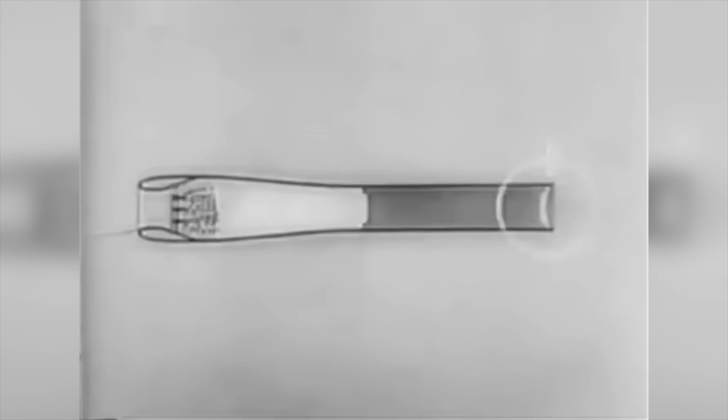The steadily inflowing fuel forms, with the inflowing outside air, a fresh mixture. This dilution wave, which is reflected on the closed valve box and runs to the open end of the pipe, was also created during the ignition. Here, it transforms into a compression wave that runs back to the valve box and closes the flaps again.

Repeated, the dilution wave opens the flaps. The overpressure or compression wave closes them again. The acceleration of gas particles that are ejected at the open end of the pipe is connected to the wave process. The outflow at great speeds creates thrust in the direction of the arrow.

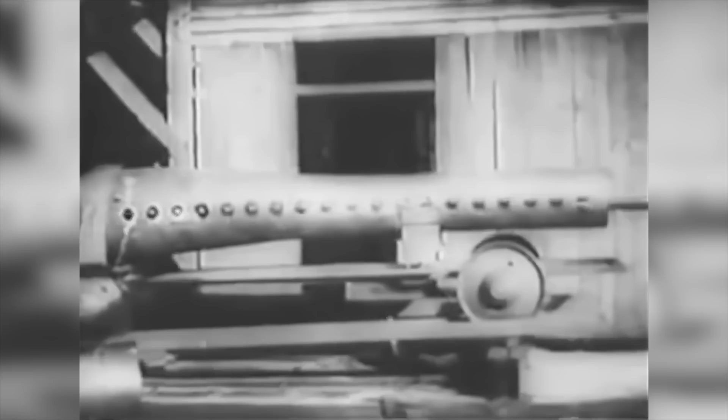The physics of the moving gas waves is the invisible secret of the pipe. What is difficult to understand in theory is shown to us by the slow-motion camera at the test stand, the pulsating work of the pulse jet. The following details are of the engine on device 76.

The pipe in flight condition. Hood removed. The hood is used to cover the aerodynamically unfavorable pipe head. The tube is suspended from the fork with rubber bearings. In front of the valve box, which contains the air valves, the lines for fuel and starting air.

Flap box removed. The cover protects the flap box from the flame and improves the mixture preparation. The thrust tube itself is just a sheet of metal tube, an engine of the utmost simplicity. Here is the flap box from the front, with many small air inlets. The cover is on the back.

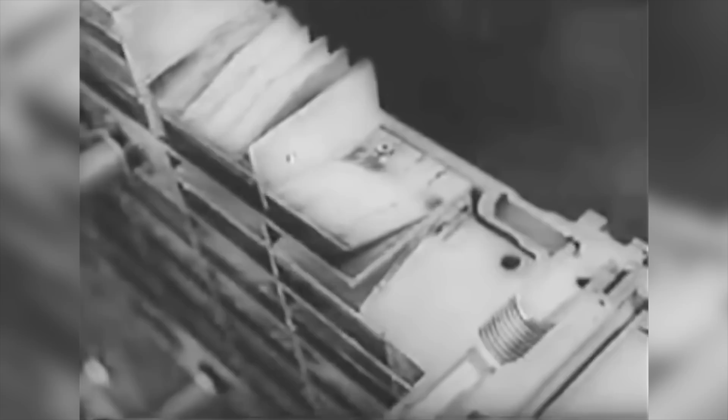Now that the cover is removed, you can see the injection nozzles, which spray fuel, and the springy flap valves made of thin sheet metal. In the rhythm of the explosions, the flap valves close and open the pipe to let air in again and again for new combustion. The device is ready to go on the launcher.

An engine test run is shown. The ignition is switched on. The pressure of the compressed starting air is correct. The space behind the pipe has been cleared. One push of the button. Partial load.

Full load. The flap valves are working. The mysterious process of the successive explosions takes place in the pipe. Slow motion recordings show the flap valves close and open in rhythm with the explosions, while the nozzles inject fuel into the combustion chamber. With this engine, the device can cover long distances.

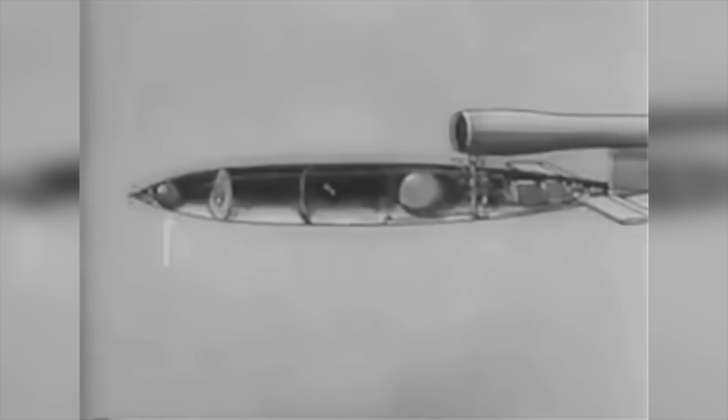Overview of the control systems in the fuselage: compass, compressed air tank, control unit, rudder machine, elevator machine. The compass sits behind the aluminium fuselage nose. It is built into a hollow sphere made of wood, which protects it from the disturbances caused by sound vibrations of the engine. The compass, whose magnetic system is equipped with pneumatic taps, keeps the missile on course.

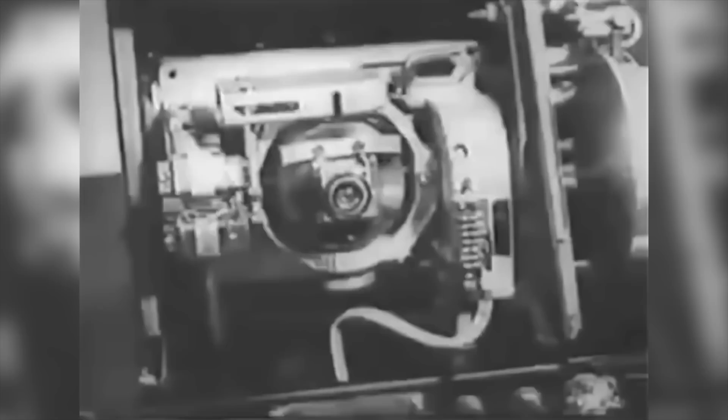The compass pulses are amplified and attenuated in the control unit. The control unit, a pneumatic gyro control, monitors the horizontal and vertical attitude of the body. It combats gust disturbances faster and more sensitively than the best pilot. Tough development work was necessary until the control unit worked flawlessly, despite the launch blast and the engine vibration.

The attitude gyro measures the inclination angle of the flying bomb around the vertical and transversal axis. Contact drive for angle shot. Height box with amplifier piston for height control. The left side, dampening gyro for transverse axis. The right side, dampening gyro for vertical axis.

These gyros dampen the spurious rotations of the flying bomb. Here, the pendulum support of the attitude gyro, by which an error of migration around the transverse axis is prevented. At the same time, currents controlled by the compass flow in these support coils, which prevent migration from the target course. These coils are also used for angle shots.

The attitude gyro is a motor. Running at around 30,000 RPM, in its cardanic suspension, it forms a solid base and allows in this way the measurement of the angle of deviation of the missile from its normal position.

Locked like before the launch. After takeoff, the device flies at a fixed climb angle. Upon reaching the normal flight altitude set on the ground, the height regulator shown here has the task to swivel the gyro frame so far that the device gets deflected from the climb into a horizontal flight leading up to the target.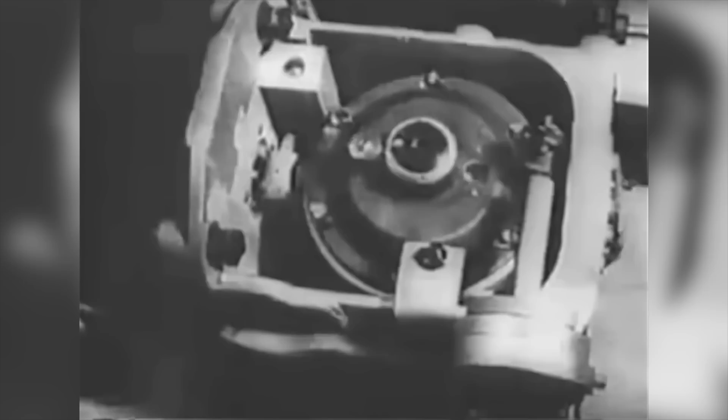The measured values on the position and attenuation gyroscopes are taken with the help of so-called jet pipes. The exiting airflow causes different pressures in the two holes depending on the body position. The ratio of these pressure differences is equal to the rudder deflections. These commands are transmitted from the control unit to the rudder machines through hoses and pipes.

Here, the fine steering impulses are converted into powerful rudder movements. The compressed air pressure of 6 atmospheres gives 60 kilograms of adjustment force. The cooperation of the control organs ends in the rudder deflections. And unaffected by any interference, the missile is maintaining its prescribed flight path from start to finish.

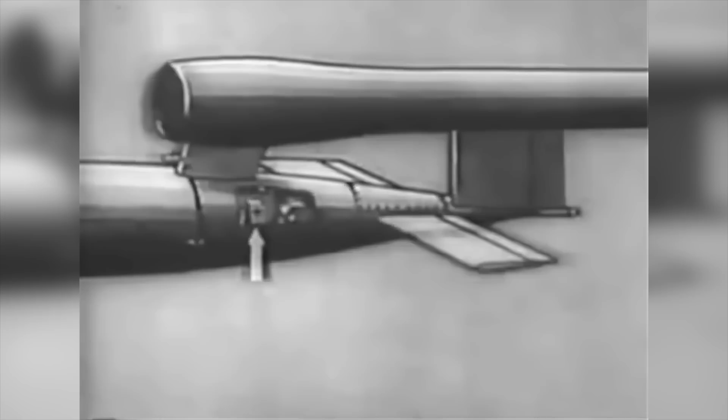Special devices are also built into the device to carry out its tasks. Air log, belly contact, electric detonator, mechanical impact detonator, mechanical long-term detonator, counting unit, descent flaps, and the antenna.

While the compass pays attention to keeping the course, the odometer tells when the desired distance has been covered. The log wing propeller screws its way through the air. The revolutions are transmitted electrically by the contactor to the counter, where the distance covered is registered. After 60 kilometers of flight, the counter activates the first contact, arming the electric detonator.

This detonator can be triggered by a membrane or tube contact in the tip of the bow, by a belly landing contact, or by heavy impact. The electrical lines between the odometer, detonator, and compass all run through the top of the cable duct to the control unit and the counter in the rear. If the device lands flat due to any malfunction, the belly landing contact triggers the explosive charge.

The drives of these two mechanical detonators are released by the ripcord. The one on the left is a mechanical impact detonator. The one on the right is a long-term detonator. This is the counter in action. The 140-meter long antenna is coiled in this tube.

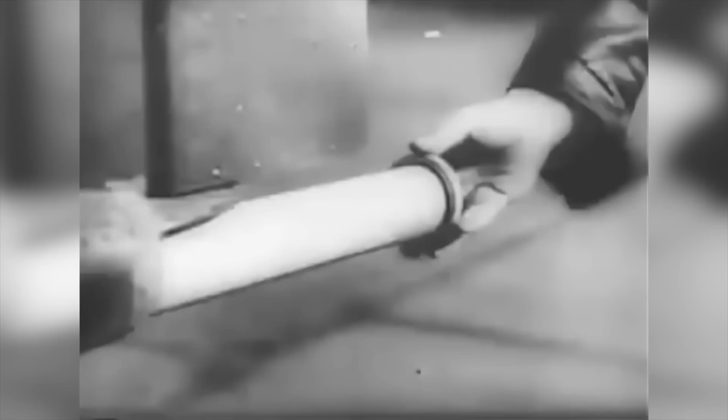Shortly before the destination, the antenna is released electrically by the counter. The disc pulls out the cable in 1 second. The transmitter can radio back the position. Only some of the devices are equipped with a transmitter to check accuracy. The counter works incessantly towards the number 0 in order to switch the descent contact.

The underside of the fuselage is smooth in high-speed flight. The descent flaps are folded under the fins until the counter has reached 0 and the descent is triggered. Then, the flaps stand in the airflow. The device plunges down into the target in a steep dive. It can reach speeds of up to 850 kilometers an hour up to the impact.

Passage from home to front. The industry delivers separately to home ammunition plants. Fuselage in the delivery condition, load space, surface wings, spar, and accessories. In the Heimatmuna, the parts are subjected to a detailed examination, assembled on a trial basis, and then brought back to the state of supply.

In this form of transport, all parts are attached to the fuselage and propulsion pipe in such a way that the device is only a meter wide. On top of the tube, the horizontal stabilizer in a protective box. The sensitive bow tip with protective hood is housed under the tube, between the surfaces attached to the side. By rail transport, the devices make their way to the front. A wagon can be loaded with 3 devices.

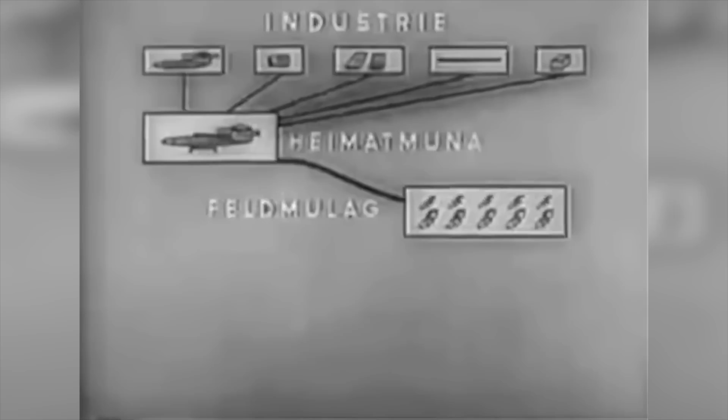First, they come to the Feldmulag, the larger field ammunition storage, where storage in large numbers is possible. The Feldmulag serves as an interim storage facility. No work is carried out on the device here. The transport continues by rail to the supply point. Here, the devices are checked for damage, filled up with fuel, and then transported via trucks to the collection points.

There, the devices are first brought into the pre-assembled state. In this condition, all work and tests are carried out except for surface mounting and setting of the trajectory values. The device can be stored until the takeoff command comes. The last job is to bring the device into flight mode. The device is ready to be launched.

Fuel and compressed air are filled in. The onboard battery is inserted. All devices are checked. The flight order has also been issued, because on the control system the course and altitude, and on the counter the distance, have been set. Starting with the industry that supplies the individual components, the path of the device was followed up to the front. Now, the device is in flight status and is on its way to the launch site.

The device is shot in the air with this gun, and then flies on by its own power. The gun or starting ramp length, 48 meters. Departure speed of the device, 370 kilometers per hour. At the end of the pipe, the so-called steam deflector, which deflects the ejecting steam laterally and downwards.

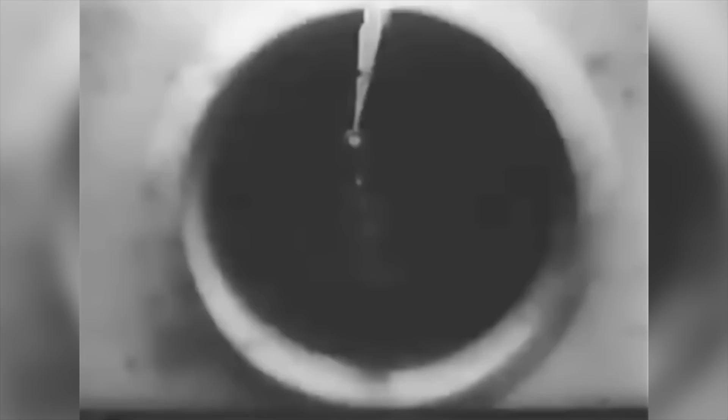The device glides on these surfaces, which are located just above the slotted tube, when it is fired. The control unit with electrical and pneumatic supply lines. The piston nose protrudes through its slot in the gun barrel, which latches on to the underside of the device. The suspension device for the sealing tube with the loops is pushed in.

This is the piston that latches onto the device via the piston nose and flings it out. The piston comes out of the muzzle like a bullet and flies in a high arc into the terrain. It will be brought back and reinstated. The opening onto the piston nose, to which the sealing tube slides. The robust steel piston weighs 150 kilos. It is pushed into the pipe without a piston ring or special seals.

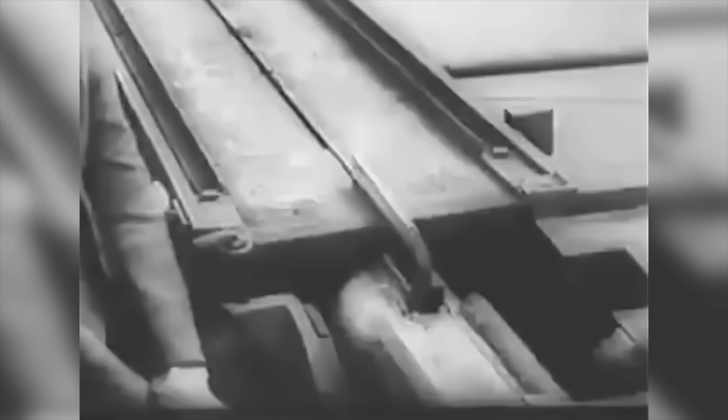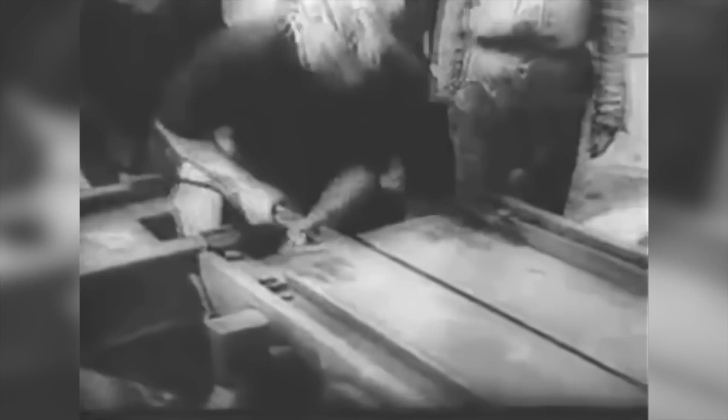Loops and pistons are inside. Now, the sealing tube is pushed in. The sealing pipe is 48 meters long, the length of the ramp, and has a diameter of 25 millimeters. Its hook-shaped end is attached to the beginning of the gun barrel. A device is used to bring the sealing tube located at the bottom of the gun barrel to the slot. The loops, which are distributed at intervals of 1.5 meters, hold the sealing pipe in its position.

The gun barrel is clear. The device can be put on. With this gun feeder cart, the 2.2-ton device is easily placed on top of the gun. The feeder cart is coupled to the gun. After releasing the connection to the undercarriage, the upper carriage with the device is rolled over onto the gun. The gun barrel has an incline of 6 degrees.

The device is placed on the gun by means of clever spindle drives. Under the fuselage, you can now see the fitting on the aircraft descend over the piston nose. The connection between the piston and the aircraft is established. The upper carriage and the feeder carriage are rolled back. Next, the steam generator must be connected.

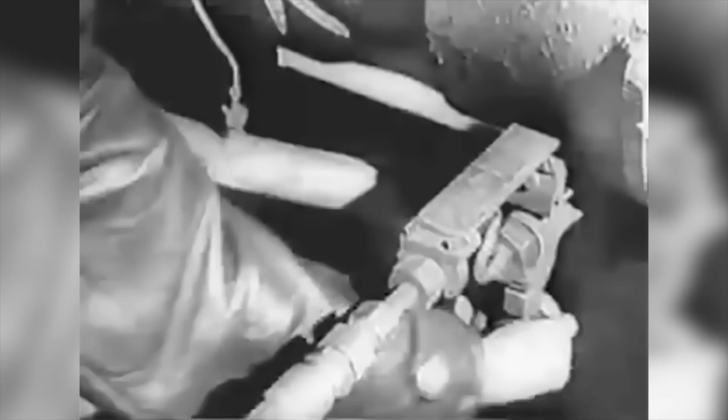The mobile steam generator unit develops the energies that eject the device with a force of over 40 tons. Propellant and decomposer catalysts are blown in through the showers in the decomposition room or reaction chamber. Compressed air gets filled in. The steam generator is charged by separately filling in propellant and decomposer components, called T and Z stuff. When T and Z components come together, there is a violent buildup of steam.

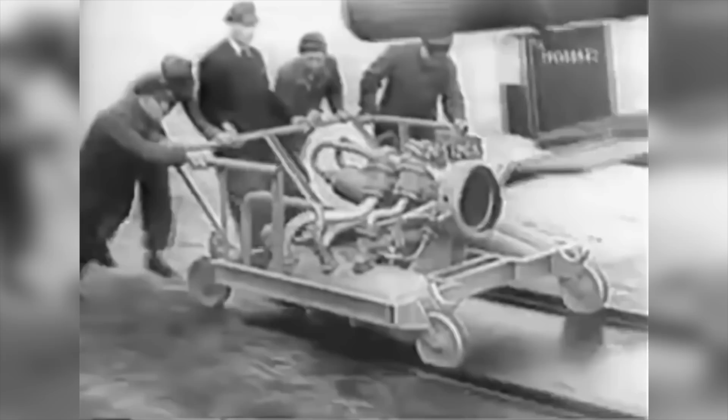Therefore, be careful when working with these substances. Make sure there are no dirt particles on the T component, otherwise there's a risk of fire. Dirt, gasoline, and T component pose a risk of explosion. Rinse away any overflowing T component immediately with water. Wear protective suit and glasses when working with T and Z components. The steam generator, which was made ready independently of the gun, is now coupled to the gun.

The final touches are done. The Device 76 is ready for launch. When deployed, the gun ramp is built as camouflaged as possible. The aircraft and gun ramp are camouflaged to adapt to the terrain. Earth hills and concrete walls should protect the high-quality device from air attacks. In front of us is the ready-to-go gun. How does the startup process take place?

The piston is pushed in. The skid lies on the side. The plane descends onto the ramp. At the front, the driver fitting rests on the piston nose. At the rear, the stern rests on the skid. Now, the steam generator comes into operation. Propellant and decomposer are injected. The sealing tube under the slit is pressed upwards by the steam. The steam expands and propels the piston forward with the aircraft on top.

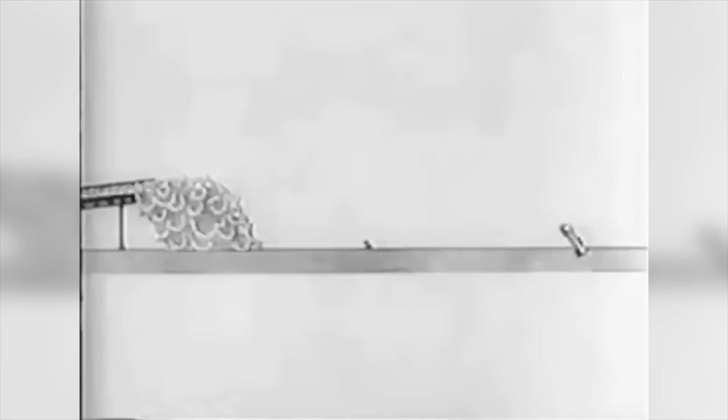But how does the slot in the launch tube get sealed? The sealing tube slides under the piston nose, then bends upwards and is pressed against the slot behind the piston by steam pressure from below. In a matter of seconds, the aircraft races over the slideway and soars into the air. The piston and skid fall off. With this new launch method, the long-range bomb can be shot in quick succession against a target located far away. It launches in a few minutes.

The gun leader sits in the bunker. The start commands come from there. With the command device, the firing process is monitored and triggered by an electric remote control. The launch time is getting closer. The main switch is on. The voltmeter indicates that it works. Now, the 3 warning lamps must light up. They tell the gun operator the device is ready to go. Time is starting to run. 2 more minutes.

The compressed air for control and engine is on. The control gyroscopes start up. Faster, ever faster. The last man leaves the launch site. The device is tied up and ready to go. Time is running. 10 seconds to go. Starting pipe engine partial load. Full load. Time is running down. Caution. Launch. Unmanned, self-steering, the long-range bomb makes its way and carries out her mission undetected and unaffected. Now, a launch in slow motion.

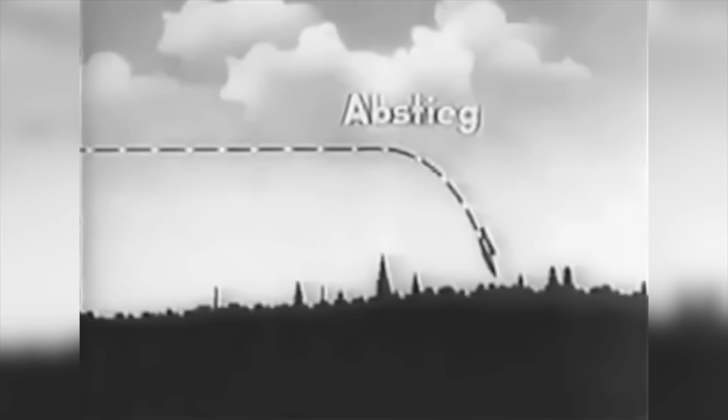An angle shot. If the trajectory of the fixed gun does not coincide with the target, the device is brought onto the new course at an angle. Now, you can see it clearly, or not. The machine curves to the right in the new direction. The process is activated by a mechanical drive and ended after a set time. Then, the further exact course correction is taken over the compass.

Now, the schematic representation of the angle shot. The angle firing device enables the changing of direction of 60 degrees, to the left or right of the gun's direction. The curve is initiated after a flight distance of about 15 kilometers. Our model airplane took off. Angular shot correction starts. It was set at 45 degrees. Now it's on course towards the target. The target is reached. Descent and impact.

The device is used to combat area targets. In the middle of the hit grid, the impacts give a picture accuracy which corresponds to the requirements of the mission. And now, some more shots of the launch and the flight of the FZG-76 device.